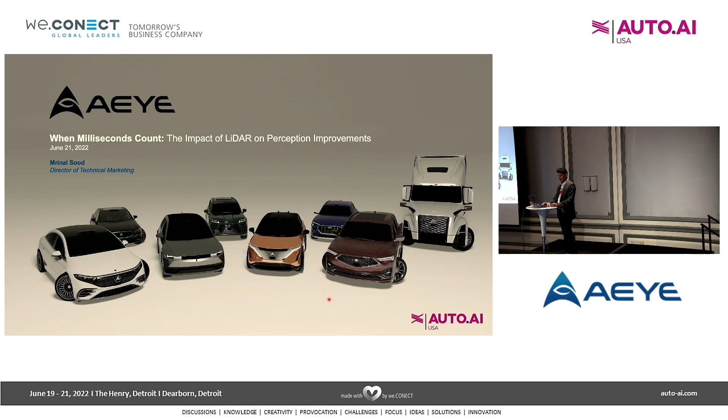I'm Mrinal Sood. I'm the Director of Technical Marketing at AEye, and today we're going to go over how we at AEye are improving perception through lidar for situations when milliseconds count.

Just a quick background about the company. Our founder, Luis Dussan, built missile and plane tracking systems for the U.S. military. A lot of his inventions are commonly used in the battlefield today, and in 2013, he founded AEye to apply his learnings from the military background to the world of autonomous vehicles, especially for high-speed tracking.

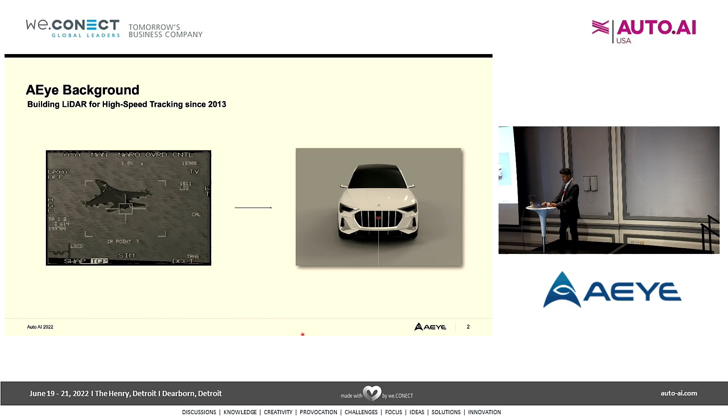With that said, let's first go over how we drive. Our human mental processing time can be broken down into 4 typical sub-areas. During driving, you have sensation time that involves getting sensory inputs from things like brightness, contrast, size, loudness and so on. Recognition time is us making meaning of the sensation, like, okay, this shape is a tree or it's a person. And then we take the time to interpret the scene and possibly extrapolate into the future to try and become situationally aware of what's going on.

For example, if we see a pedestrian and look at our vehicle speed and the distance between us and the pedestrian, we could say whether or not we're going to collide with them. And then finally, we select a response and ask ourselves, should I apply the brakes or should I just steer a little bit to the right? So that's our mental processing time.

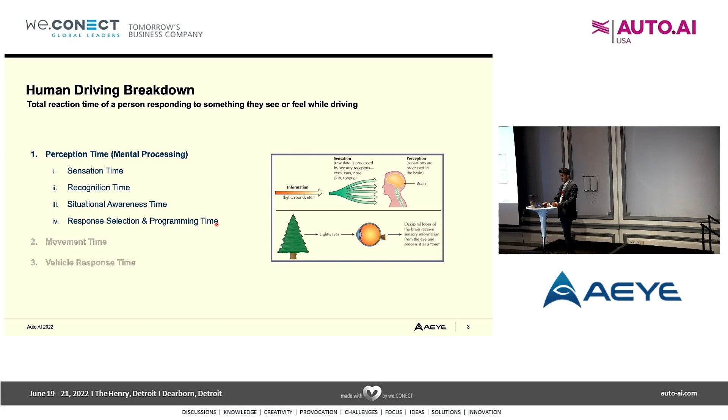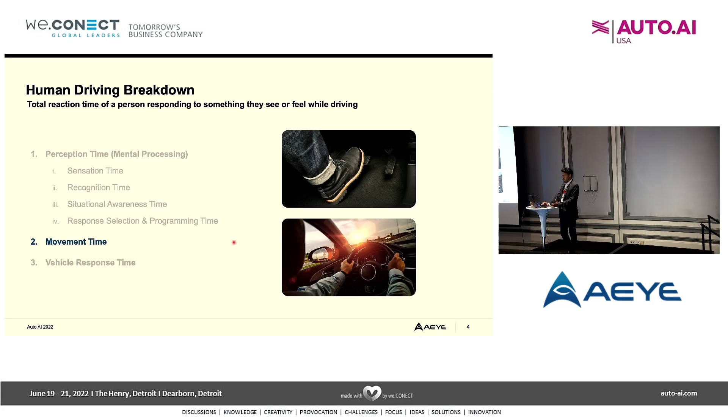Once we select a response, we actually have to take time to move our hands for steering, as well as moving our feet laterally to press the pedals so we can engage the brake. And then after applying the brake, stopping the vehicle becomes a function of physical forces, including gravity and friction. So things like the condition of your brakes, tire pressure, road surface, asphalt, cement, gravel, all start coming into play in the vehicle response time.

This chart shows how the perception and reaction distances increase for cars and trucks based on speed. For the general population to start gaining trust in autonomous vehicles, machine perception and reaction distances have to surpass human perception and reaction distances.

We're already at 150 meters on this chart at the max for total stopping distance, and this chart is representative of favorable conditions. Once you go into inclement weather, adverse lighting, or lack of lighting, the perception, reaction, brake lag, and braking distances will all get even longer than what's on the chart.

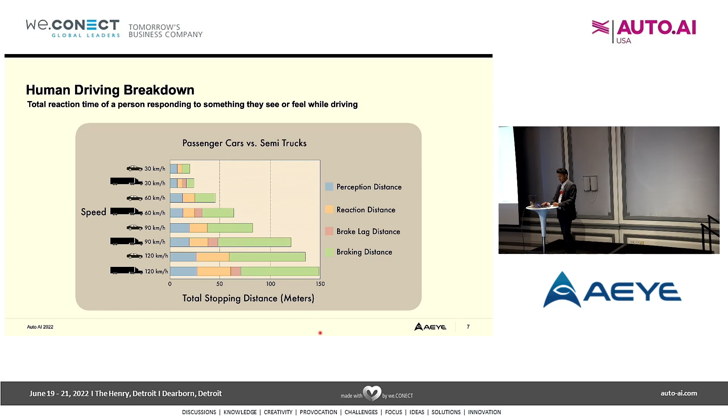If we look at AVs, it turns out AVs go through the same process that we go through: sensing, perceiving, deciding, and acting. We have sensors on the left, which include radars, cameras, lidars, and ultrasonic sensors. Then there are systems that make meaning of the sensory information through classification and tracking algorithms. Then they decide on a route and make a trajectory. And finally, they have to execute the driving maneuver.

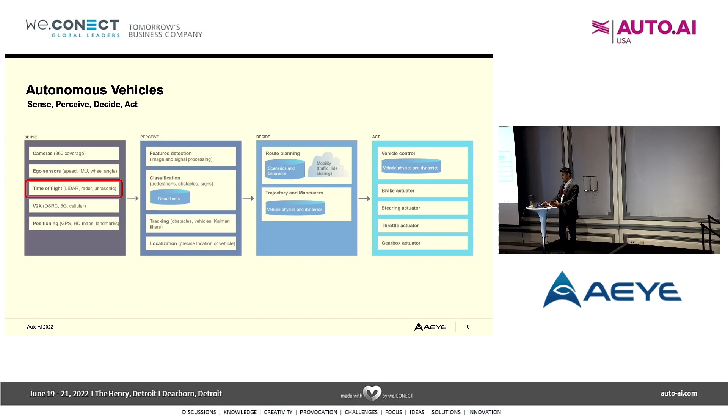But for these systems to start coexisting with us on the interstates, they'll require high accuracy depth information at long distances, especially at high angular resolutions. This has been the missing link for high-speed autonomous vehicles, because at speeds of 75 miles per hour or more, milliseconds matter, and these systems need obstacle avoidance capability beyond 150 meters and the inherent ability to track pedestrians, cyclists, and cars at 200 meters, both in daytime and at nighttime.

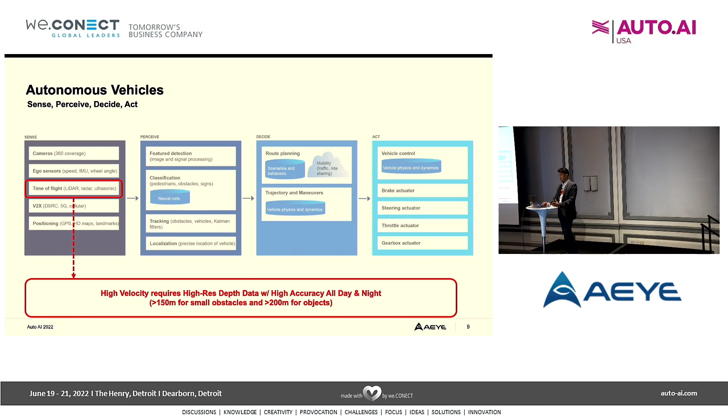In order to talk about how we're enabling high-speed driving for AVs at AEye, let's take a quick look at how lidar perception works. This is a very high-level overview, so we're going to do it in 8 steps. In the first step, you have scan definition and timing. This is where you keep track of the timestamp for each received point. You get X, Y, and Z information and intensity information, but you have to keep track of when that information came in for each frame.

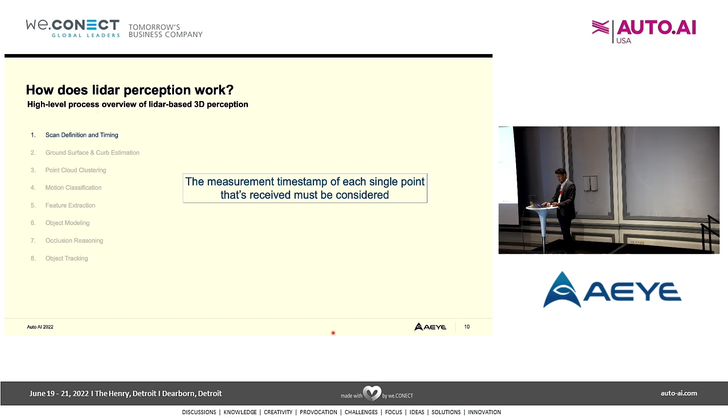Then you do some ground surface and curb estimation. So this is the first processing stage. You are separating the drivable areas from the non-traversable obstacles. So protruding and overhanging structures can be distinguished from the ground surface. So if there are things like overgrown tree branches or an overpass above you, you have to know what's the drivable surface from things above the vehicle.

And then using algorithms like elevation mapping or horizontal slope detection, you actually start to do curb detection and know, okay, where's the exact road boundary? Then in step 3, you actually have to do some clustering. So using similarity criteria, you define whether some given points belong to the same physical object. And the most predominant criteria is the spatial neighborhood between measurements, where you look at height similarities, vertical overlaps of neighboring points, and then you start to assign them to a cluster.

In step 4, you do motion classification. So this is separating your movable from your stationary elements, after you study a few frames of data. And in step 5, you extract features. So you're looking at the borders of the driving corridors, looking at elevated obstacles on and next to the road. So the output of this step is knowing the overall free space, the lane markings, where the lanes are, what the lane width is, the obstacle types, and where the unknown regions are.

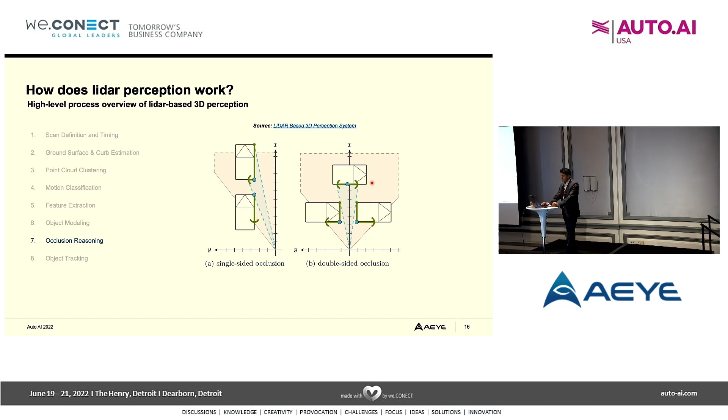In step 7, you have to do some occlusion reasoning. So this is where you're considering the field of view limitations or objects farther ahead that could be occluded by objects that are closer. In this case, you have a single-sided occlusion example, which you're going to experience in adjacent lanes on the highways. And then on the right, you have a double-sided occlusion, which is commonly seen with cross traffic at intersections.

And then in the final step, you have to track those objects. So based on the object type, the dimension, the velocity, you start to track them in real time before deciding what you're going to do in terms of steering, braking, or acceleration. So that 8-step process roughly sums up the high-level overview for LiDAR perception. Okay, now you understand how humans drive, you understand how important the stopping distance is, and we just went over the 8 steps, so you have a general understanding of LiDAR perception.

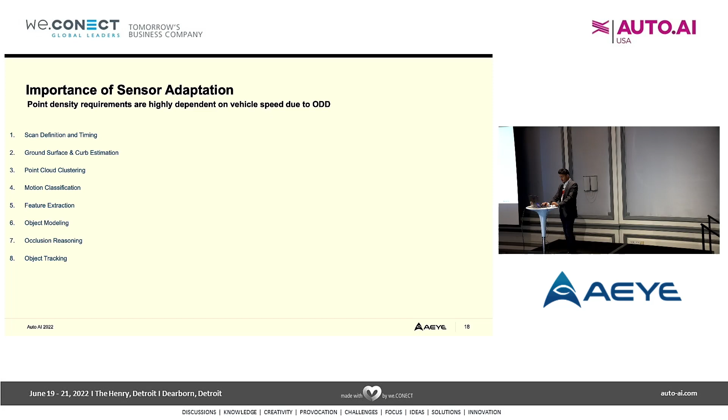But as you can see, there are 3 ODD visuals here: parking lot, urban, and highway driving. And going back to my earlier point, when these systems start going at 75 miles per hour or more to coexist with us on the interstates, milliseconds matter, and the system must be able to plan the maneuvers, keeping in mind the total stopping distance based on the speed the vehicle is operating at. So point density matters. In terms of LiDAR, the more points provided on an object or obstacle, the more reliable that whole 8-step process becomes. So range is extremely important, but it's useless without resolution to go along with it.

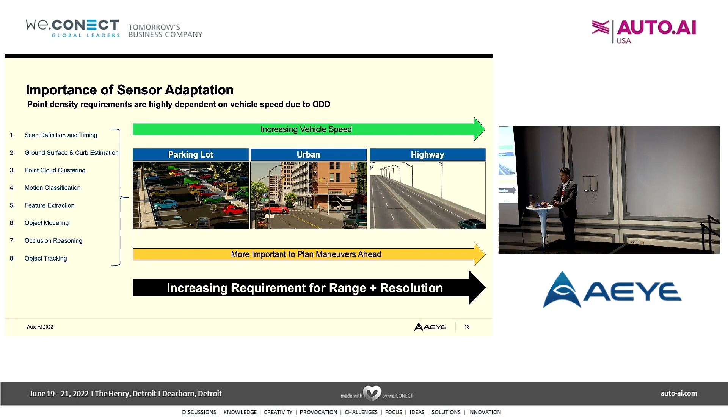So to feed the AV's perception systems reliable, meaningful data with high confidence, we created our intelligent sensing platform that we call 4Sight. It's a bistatic architecture, meaning that we have separate transmit and receive paths that don't depend on each other. So this allows us extreme configurability to independently optimize our laser firing, our beam steering, and our light receiving strategy, which allows us to program each shot. And there's going to be a video on this later.

So our laser shot energy, our shot spacing, and shot rep rate are all configurable from frame to frame, and they can be changed for the ODD that you're going to drive in. And we enable our customers to make the most of this configurability by allowing them to trigger the different modes they can configure based on input from other sensors on the vehicle, including location, odometry, speed, or even your steering angle. So 4Sight was also designed to allow optimizations over time over the air through software updates.

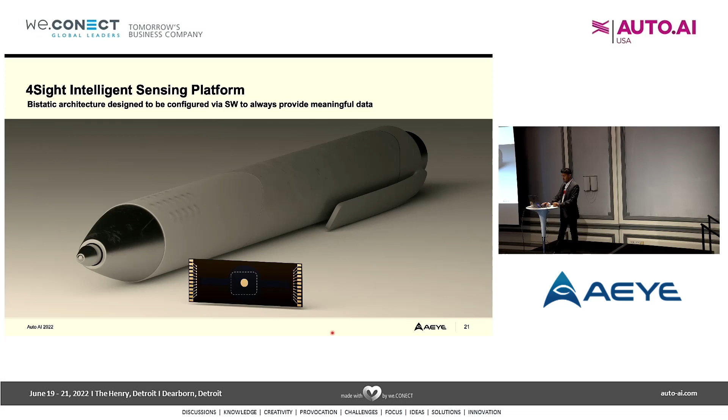Most of our competitors, including those who use other larger MEMS devices, spinning polygons, galvos, and so on, typically have scanners that are larger than 3 millimeters. And these large steering devices experience larger amplitudes of acceleration under equal shock and vibration conditions. This is because we operate outside the range of automotive vibration frequencies, and that allows us to have inherent reliability and durability, not just for passenger cars, but also for commercial vehicles, which I think the previous talk highlighted as well.

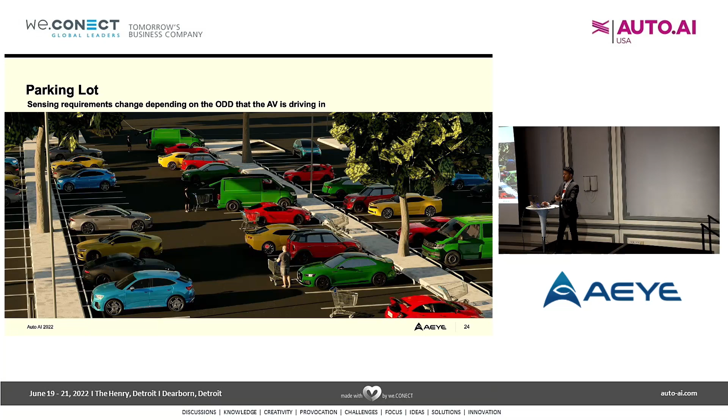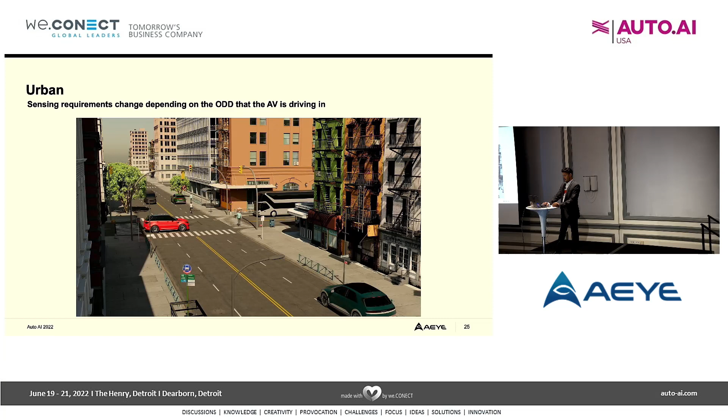So in parking lots, you care more about sudden appearances of shopping carts, people reversing out of spots, but you don't really care about what's happening 200 meters away. In urban driving, you're going faster and start to care more about intersections and bike lanes and cross traffic and so on. But on the highway, the impact, again, at 75 miles per hour can often be fatal. So detecting road debris, small obstacles like bricks or tires, these become extremely important. So you have to be able to have the obstacle detection capability at 150 meters or more, going back again to the total stopping distance chart.

If a person happens to be on the highway because they pulled over, they got a flat tire, it's important to be able to detect them at 200 meters or more so the AV can plan a safe path for itself. And then finally, if we are tracking other motorists, including motorcycles, cars, trucks, it becomes critical that they have that capability out to 300 meters so that they have enough time to plan as well as stop the vehicle if needed, especially at highway speeds. So again, these capabilities are what will allow AVs to coexist with us on the interstates. So highly accurate point density at long ranges is what has been the missing link.

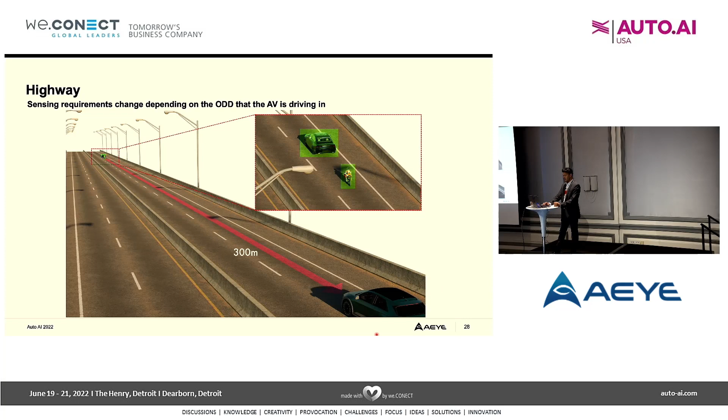So with all that said, in 2020, AEye and Continental formed a symbiotic relationship. We at AEye optimize performance modes and are responsible for the point cloud quality as well as making sure that the confidence fed into the perception systems is high. And Continental productizes and is responsible for the functional safety, validation, production, warranty, and support. And they also have sensor cleaning and defrost offerings for lidars, if you're mounted on the exterior of the vehicle. And together we're going to be launching the HRL product line in 2024.

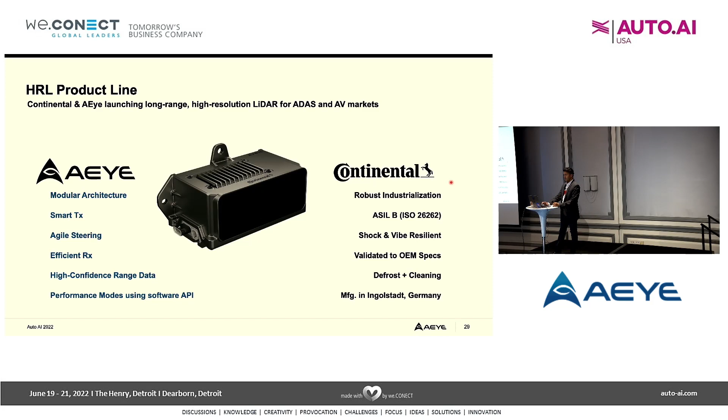This is a good way to visualize how this relationship works. Together we engage customers, strategic customers, and tackle both the performance and product requirements for high-performance lidars for ADAS and AV markets globally. Customers will tell us what their deficits are for perception. Everybody uses different types of cameras, different types of radars, so no one has exactly the same type of requirement.

So we sit down with them, they'll feed us their information of what they're looking for, we optimize modes that work for them, and then Continental finally delivers the product with the modes that we've created for that customer to the end customer.

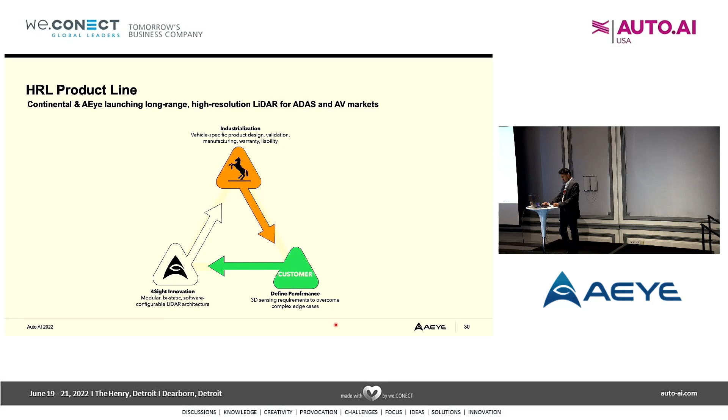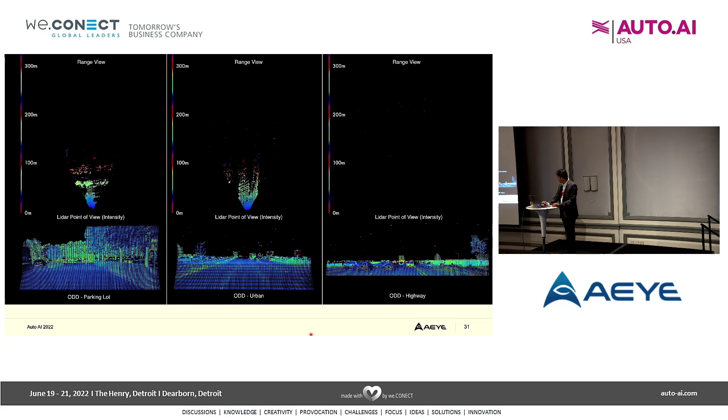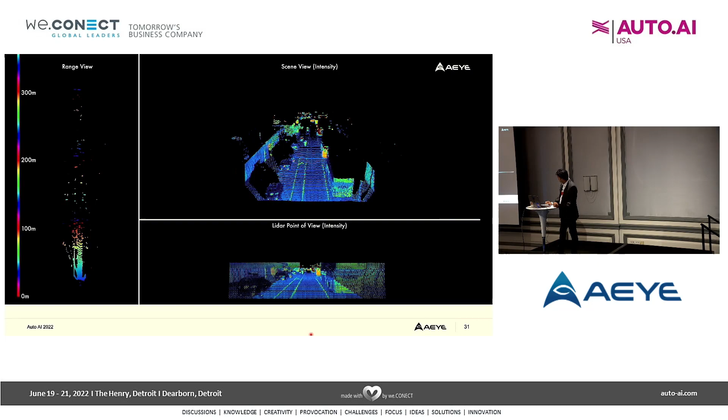Okay, now let's watch a video that summarizes most of what I just said. I actually flew through a lot, and we're at 20 minutes, so we're good. Now the resolution and density at the bottom, we're not aiming at the sky, wasting energy.

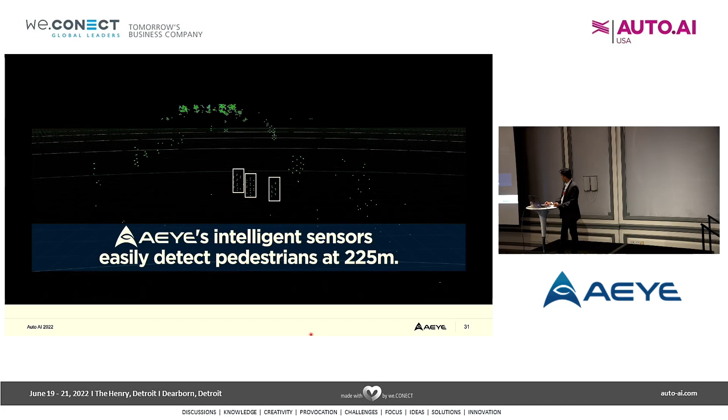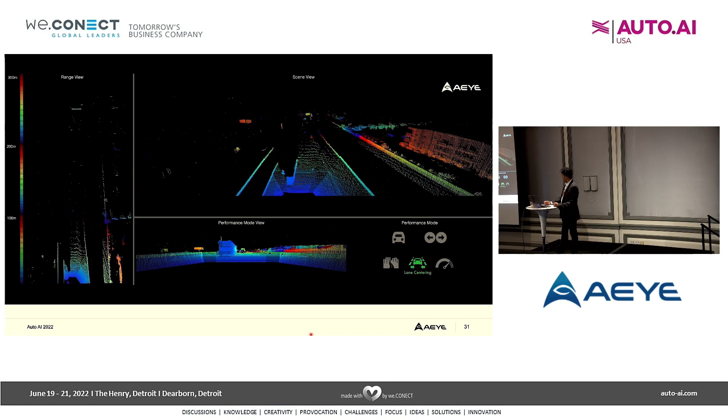Here you're going to hear a tone every time. This is actually a real driving scenario, so every time we change a mode, there's an audible tone. You can see sort of the driving maneuver that's being performed with the icons on the bottom right.

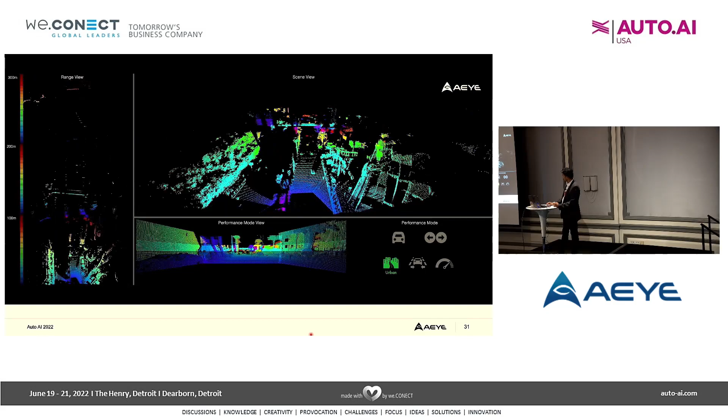So that kind of summarizes the overall benefits for the 4Sight platform, but I have one more video to drive the message home, and I'll leave you with this highway monitoring use case for ITS applications where we maintain pretty high point density on objects. You're going to see like 10-ish, 8 or 10 points out to 500 meters on cars, and this is possible because you're at a very high vantage point, so you're not being occluded by cars directly in front of you.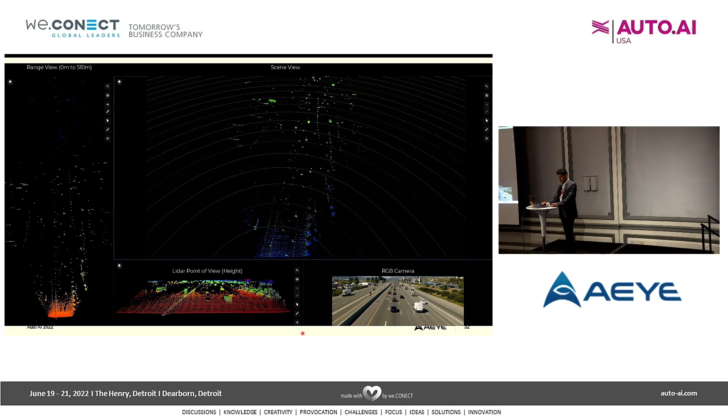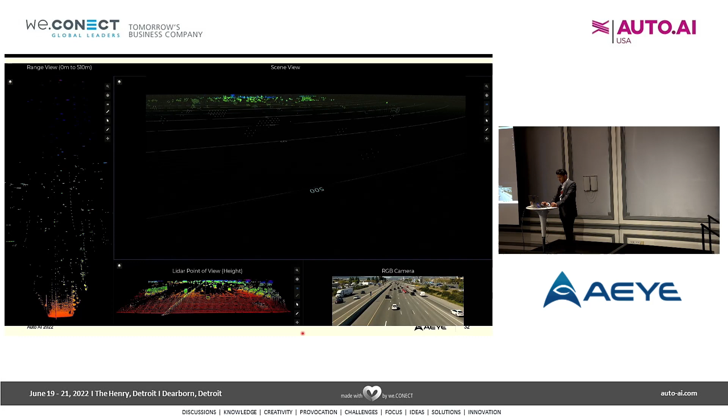Questions? Okay. It's like I've done my steps for the month, by the way, in these 2 days.

Thanks for the presentation. I'm G from ZF. A quick question. How does the LiDAR know if there is a slope of the road so that you need to focus somewhat uphill? So we don't actually keep track of the slope itself. We keep track of the 3D data, but the vehicle will provide odometry information and can trigger the sensor. So if there's an IMU in the vehicle and you're getting roll, pitch, and yaw information, you can use that information to tell the LiDAR if you want to go to a different mode that allows you to track the horizon of the vehicle or of the roadway.

The road can be flat, but there's maybe an upslope further away. So the LiDAR needs to know to aim somewhat up when the vehicle is still on the flat sections. So how does that work to look at a further section of the road where the uphill is? That's a good question. We do have, as part of our inherent firmware, the ability to do what we call pitch lock loop, where we look at how the road gradient is changing, and then we adjust the ROI within the sensor.